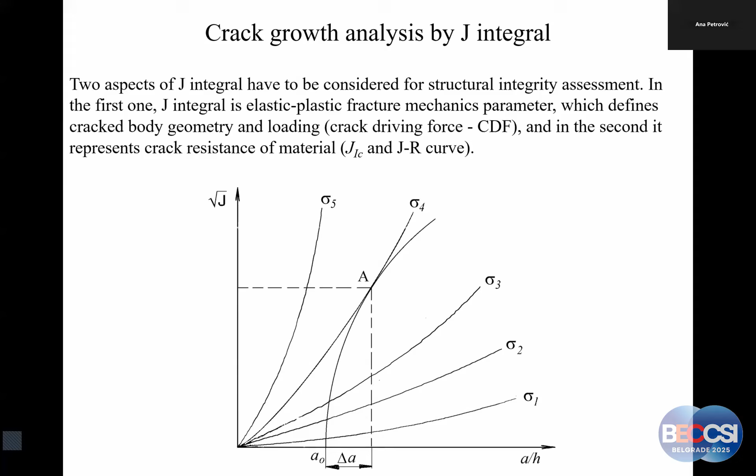Now, direct measurement of J integral breaks this barrier, and maybe offers a different interpretation of this parameter on its own.

It is the original paper that we have used from time to time here in Serbia and also in USA, while we had a large USA ex-Yugoslavia project back in 1982 to 1990. Cooperation with one of the key men in this project was Dave Reed, who is mentioned here.

Just to remind you, the J integral is a line integral independent of the path. It's all about energy - it is strain energy. It involves some stress tensors and some displacement.

When we develop it into components, we can write strain energy as shown here, and then for some specific problems we can reduce it to just strains. Now let me say more details about that.

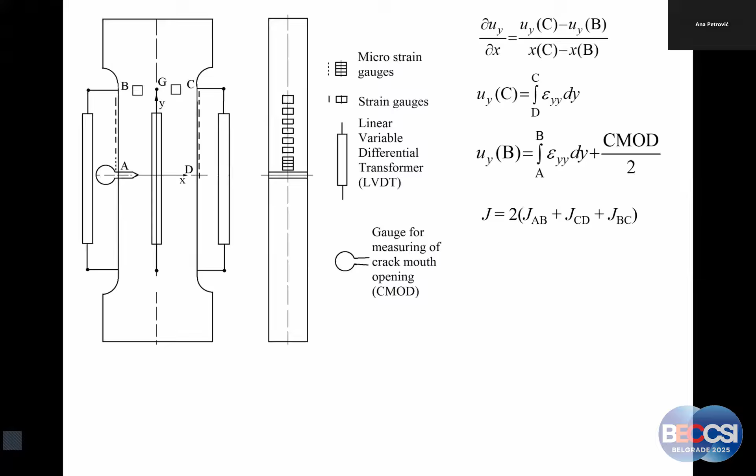This is how one of the measurements was done. There are all these strain gauges. This is quite old, more than 40 years. It was done at the National Institute of Standards and Technology in Boulder. Dave Reed was doing it together with Blagoj Petrovski, who was then a visiting scientist there. You can see that the crack was positioned in a welded joint. Once again, not very important, but it has some consequences.

Oh, sorry, just for a second to go back. At the same time, a standard 3-point bending specimen is shown here for comparison. I'll explain soon.

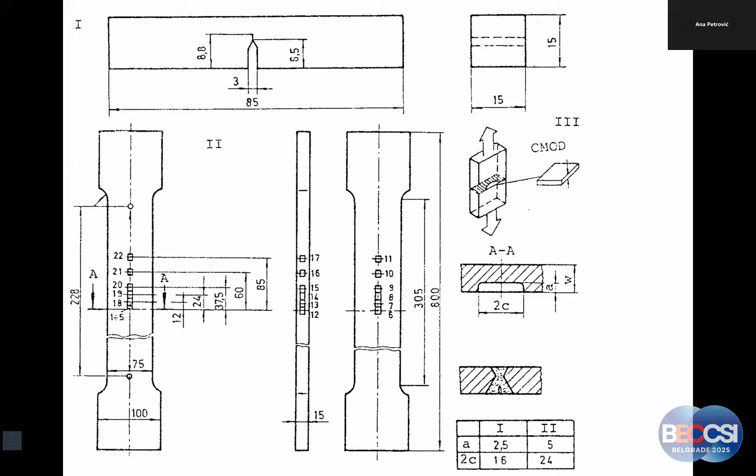More details about the crack and more details about the path. Misak, help. What happened? Oh okay, just another click. Okay, thank you.

These M's are actually strain gauges, and there is a CMOD gauge measurement device here, and that's all we need. So just memorize that all we need are strains along the outer path plus a CMOD measurement device, and strain gauges along the other outer part. Knowing all that,

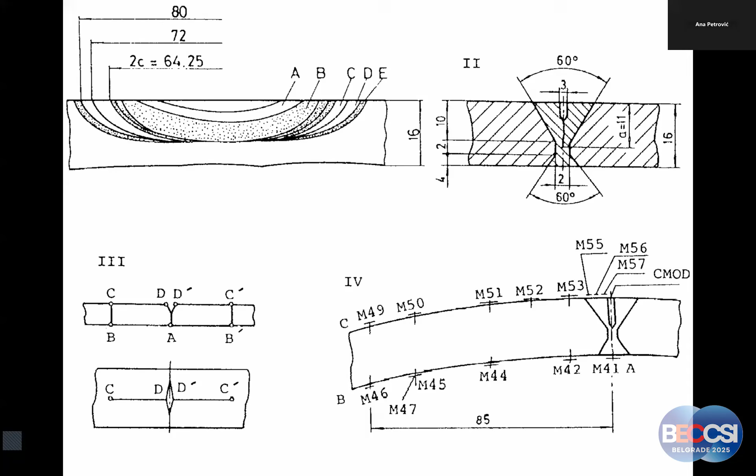we can get J integral by direct measurement because we can use those simplified expressions that I showed. And then it is

interesting to compare JR curves obtained in this way, and I'm showing them as measured by panel tension or other crack types. They are actually wrongly marked here. Oh no, surface crack, no. Doesn't matter really, two different

crack lengths and two different J curves positioned differently. And then just to compare with 3-point bending, you can see that crack resistance is higher for panel tension specimens, or tensile panels. This is obvious, the reason is obvious: 3-point bending is more harsh loading than tension.

But on the other hand, we of course like to have a conservative approach. This is why we use 3-point bending. But on the other hand, for example for pressure vessels, we also like to know the real behavior of the material or structure. That is the question, we'll come to that.

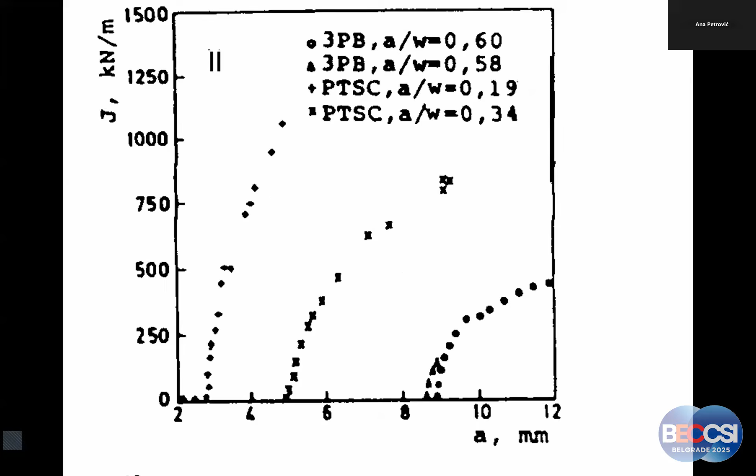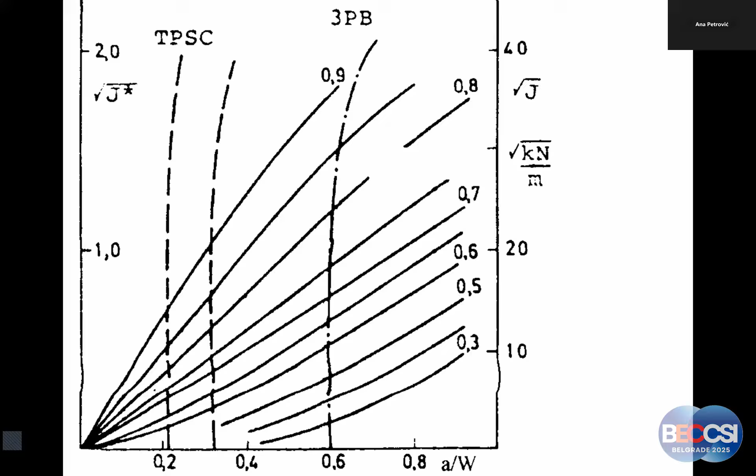So just another figure of these JR curves, and now they are positioned in a plot with the crack driving force. And now I come to the most interesting part of this story.

In ex-Yugoslavia, there were on two occasions very interesting experiments made on pressure vessels. You can see here that there is a part of this pressure vessel which was cut out and then welded back. In the meantime, complete instrumentation for measuring strains was installed. So that was a kind of unique experiment that enabled us to measure J integral on a pressure vessel. Without this cutout piece, you cannot approach the inner side, and we need both outer and inner side.

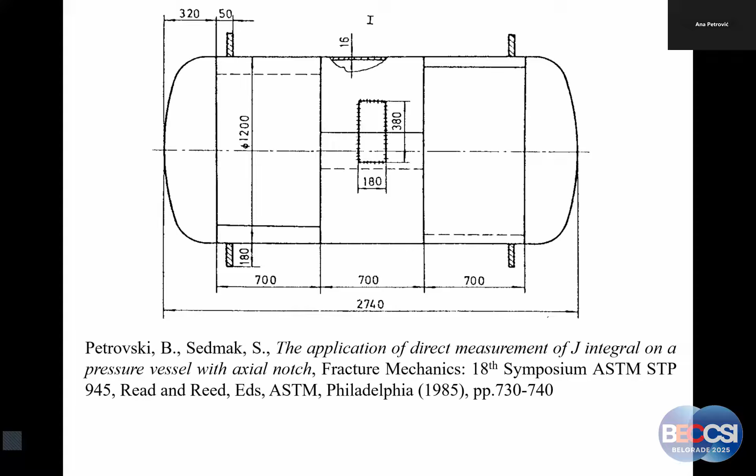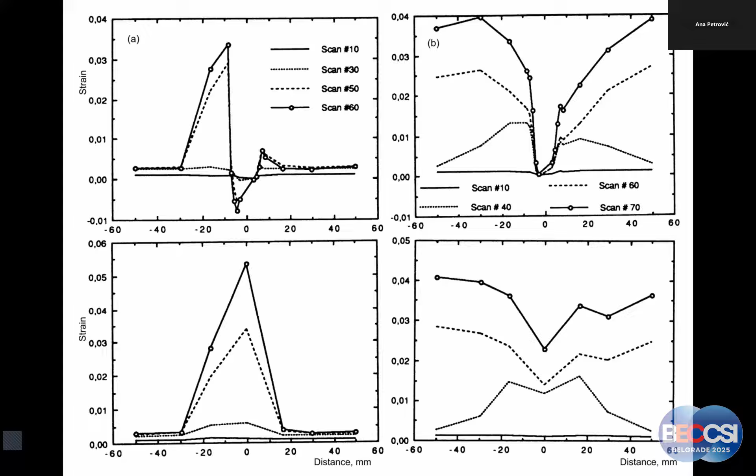Now, a couple of interesting results which show strain distribution on the side of the crack and on the opposite side. You should notice a difference in these strain distributions, because that difference is actually, as I will show you soon in a simpler example, a measure of J integral—simplified, even more simplified. So let me explain what I mean.

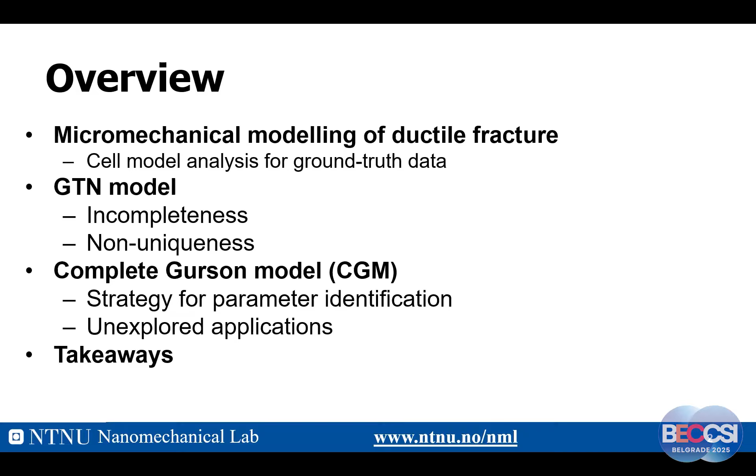Okay, so how do we teach fracture mechanics today? When we teach fracture mechanics, first we tell students that there is a crack-tip stress field controlled by one parameter, either J integral, which Alexander talked about, that's from Jim Rice, or controlled by CTOD. Several weeks later, we tell the students that's not true indeed.

The crack-tip stress field is not controlled by one single parameter. It's controlled by maybe another parameter - we have T stress or Q stress. So here's what I've plotted: the crack-tip stress field may be controlled by Tz. Professor Guan gave a fantastic talk today about the Tz constraint parameter.

In general, what we're saying is that fracture toughness is not a constant - it depends on the crack-tip constraint. Transferability is a challenge. We cannot transfer from one geometry to another.

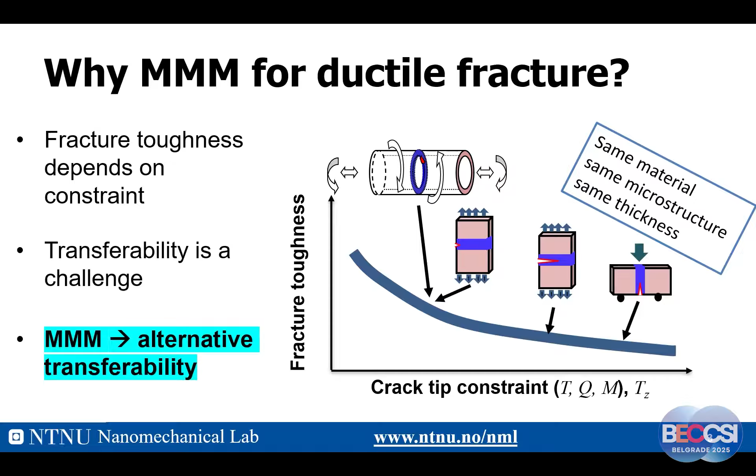So what is micromechanical modeling? It's a kind of physics-based approach used to predict macroscopic properties based on local properties and microstructural features. If you look at the specimen on the left, we can easily identify a kind of unit cell model.

Here I have a unit cell model in the center, and I have four keywords. First, there should be periodicity - that means we can repeat this unit cell model. And at the bottom, there is approximation - it's always an approximation of the microstructure, since the microstructure is always more complicated than the model itself.

With the unit cell, we can study the morphology - that includes the size, shape, and distribution of these phases - and morphology and local properties, on the right, on the macroscopic behavior.

On the right-hand side we have ground truth data - that's data we can use for benchmarking analytical results, for example benchmarking the Gurson model and the GTN model. We can use AI to identify the critical microstructure which can realize optimal performance - this is going to be the optimal microstructure. These are the things we can do with micromechanical modeling.

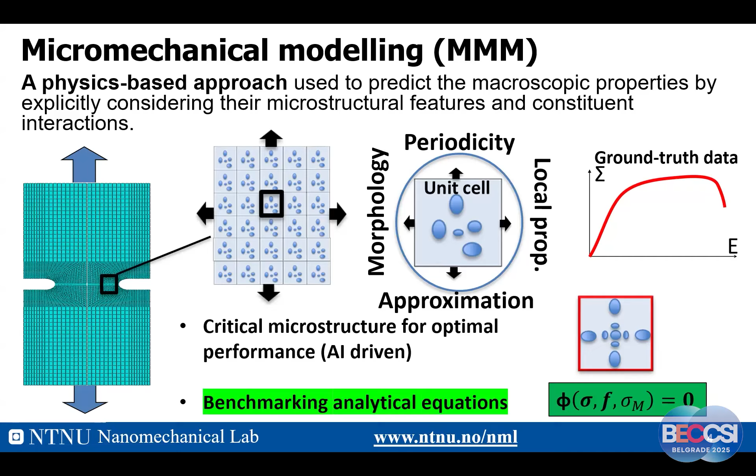Okay, let's look at ductile fracture - that's my talk. Ductile fracture is a field which is massive. Everyone has heard about this - a lot of studies have already been carried out.

Ductile fracture mechanism - if you look at the fracture surface, there are a lot of dimples. We have three stages of ductile fracture mechanism. We have void nucleation, from particles through particle fracture or particle debonding from the matrix, and this nucleation could be stress or strain controlled.

We could have plasticity-induced vacancies that could nucleate voids - this is very exciting for the hydrogen embrittlement work we are doing now. Once voids have been nucleated, under plastic deformation and hydrostatic stress, these voids will grow.

At certain stages, the void growth will be stopped, so we will have void coalescence - also called plastic localization by void sheeting. Here we have two types of loading: one is tensile, another is shear. In this talk, we will focus on tensile loading.

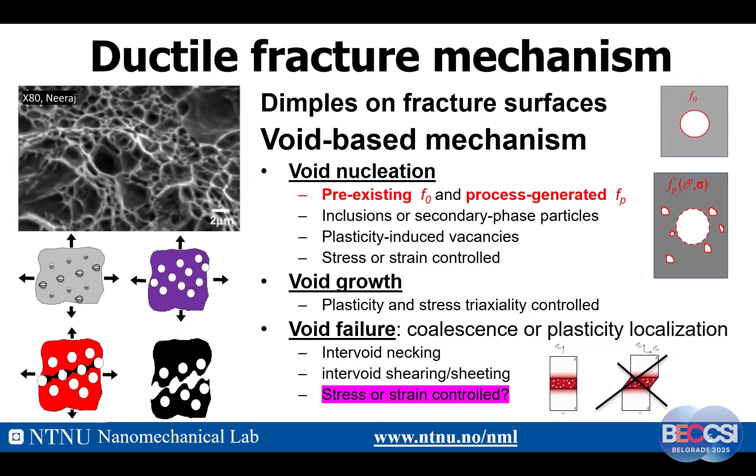My question is, can you guess - is void coalescence stress controlled or strain controlled? I will ask you this later. So let's talk about the cell model.

For ductile fracture, we can easily identify a two-phase cell model. One phase is the matrix material - that's easy to understand. Another phase is empty, nothing - so we have a hole inside. This is a very typical two-phase cell model for ductile fracture.

If we make a cell model analysis, that means we can carry out numerical analysis of this cell model. What input do we need? We need the matrix property - sigma 0, that's yield stress, and n for hardening. These are the matrix material properties. Then we have f0, the initial void volume fraction - that's the only other input we need.

Then we apply a load to this cell model, and we get output on the right-hand side - we will have deformation and fracture. This means f0 can autonomously control deformation and fracture.

Deformation is homogeneous plastic flow, and fracture is localized plastic flow. So the cell model can reveal both deformation and fracture - that's important, and that means it's complete. A complete cell model can reveal both deformation and fracture.

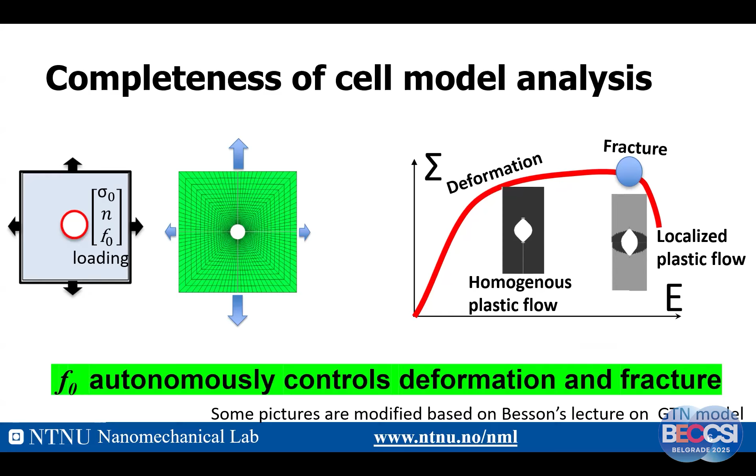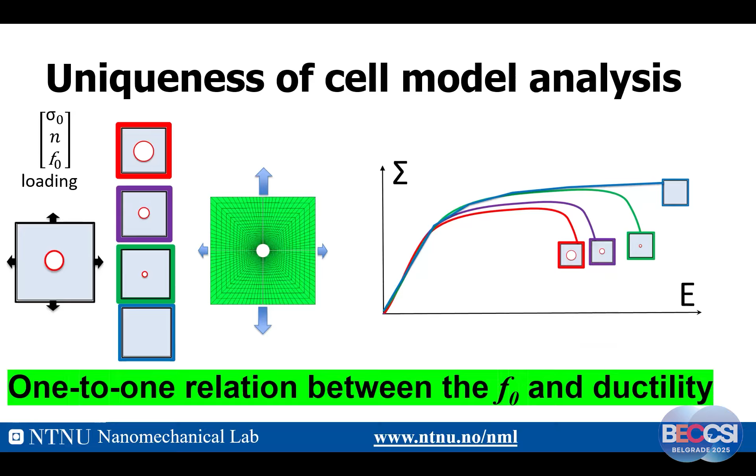Okay, this is completeness. The cell model is also unique. If we try different void volume fractions—on the left you have blue, and you have red, purple and green—so for different F0, you get different ductility. This is unique; there's a one-to-one relation between the initial void volume fraction and ductility. That's important. So for cell model analysis, we have both completeness and uniqueness.

What about the analytical models? Let's take all these models available. Everyone here knows about the von Mises model. Von Mises model could be regarded as a kind of micromechanical model as well. So let's start with the von Mises model.

Von Mises model is a kind of yield function. There is no inherent failure criteria. You can use the von Mises model to analyze the problem, but it can only yield—it cannot fail. That's an important message.

Then let's look at the Rice-Tracey model—Professor Rice again, a very famous model. If you think about it, we have an infinitely large plastic domain, and inside we have a very small void. Under plastic deformation with hydrostatic stress applied, we get void expansion.

So the Rice-Tracey model can calculate R dot over R. This is interesting, but there is no inherent failure criteria. That means you can probably use a critical value for this expansion, but you cannot predict the failure.

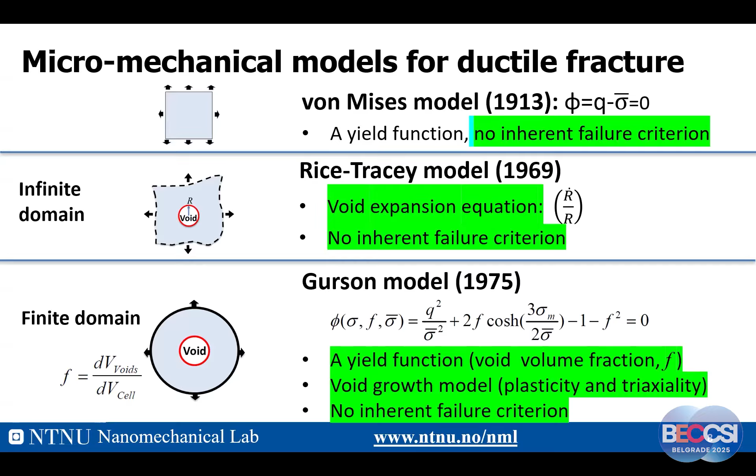So let's go to the most famous model, the GTN model. After the work of Tvergaard and Needleman, the Gurson model becomes quite capable. GTN can consider void nucleation—we could have cluster nucleation, continuous nucleation, or statistical nucleation. It could be stress controlled or strain controlled.

And then we could have void growth—that's already in the Gurson model. GTN could also consider void failure, providing a framework for it, but it needs FC, the critical void volume fraction. There is no inherent criteria for that.

Maybe it's confusing, but let me explain a little more. FC was indeed assumed by Tvergaard-Needleman to be a constant. But it turned out that it's not constant. I used the Tvergaard-Needleman data and found that FC depends on the stress triaxiality and on the initial void volume fraction. That means it's not correct to assume FC is a constant.

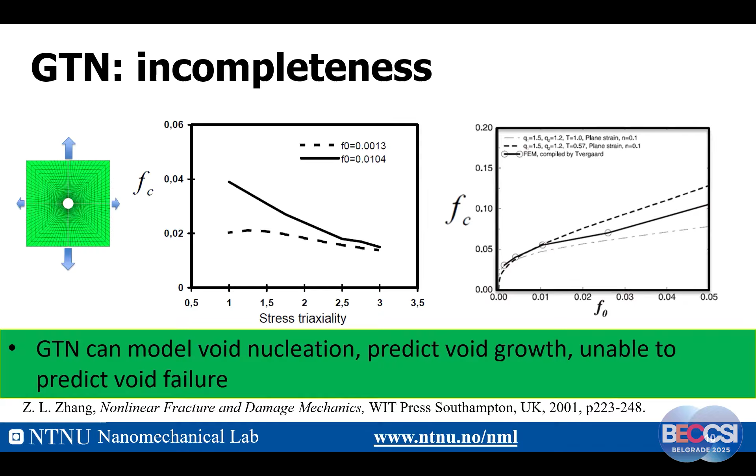So my conclusion is that GTN can model void nucleation, can predict void growth, but is unable to predict void failure. So it's not complete—there is an incompleteness problem.

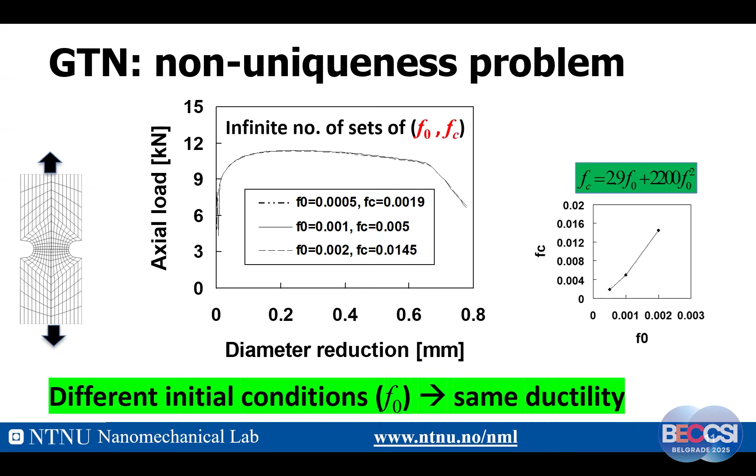And because of this incompleteness problem, there is another problem called the non-uniqueness problem. For a notched specimen, you can find infinitely many sets from F0 to FC that give identical or almost identical curves. So you can have an equation: FC equals a function of F0. That means the problem is that different initial conditions can lead to the same ductility.

That's a problem. Because of this weakness of GTN—this was around 30 years ago—I was inspired by Thomason's work. I tried to incorporate Thomason's model into Gurson's model. Ductile fracture is complete only if a model includes void nucleation, growth, and coalescence. GTN is not complete because it cannot predict void failure—coalescence is simulated by an arbitrary, negotiable FC. So by incorporating GTN with a physical coalescence model, we get the so-called complete Gurson model.

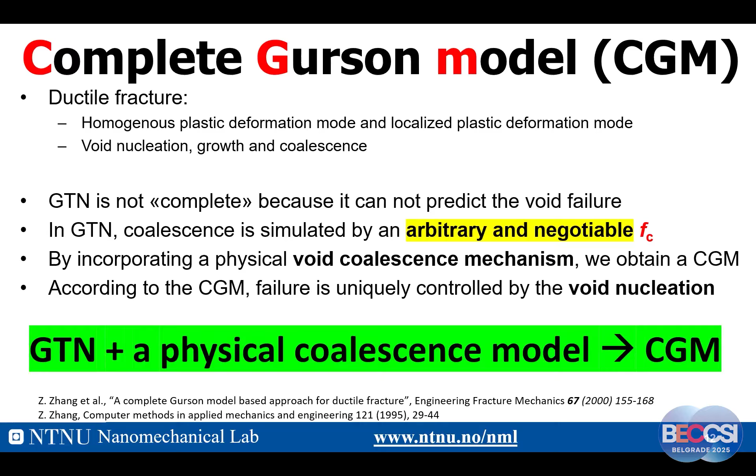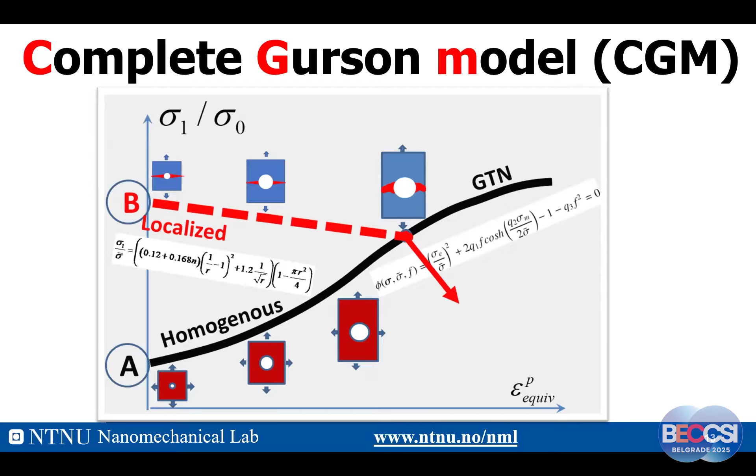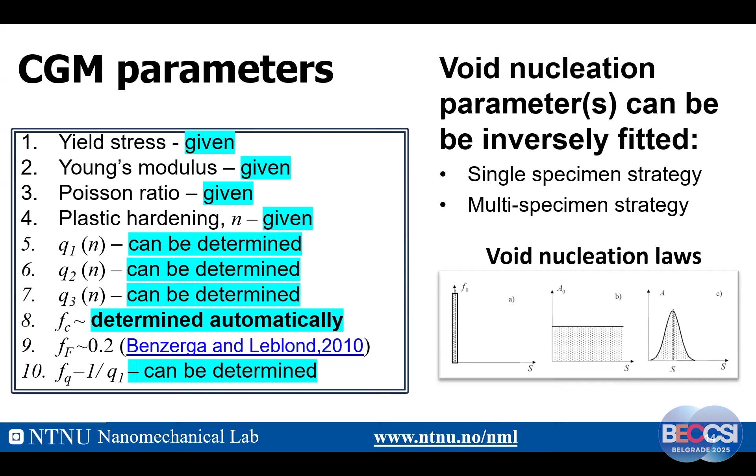We can use single specimen strategy or multi-specimen strategy to fit the nucleation parameter. Because the nucleation parameter is the only parameter which needs to be determined, it links to material failure by a one-to-one relation.

Here are the strategies to fit it. If we use a single specimen, we can make different calculations with the void volume fraction, the initial void volume fraction, and find the one that fits the experiment very well. Then if we use a multi-specimen strategy, we can fit the ductility.

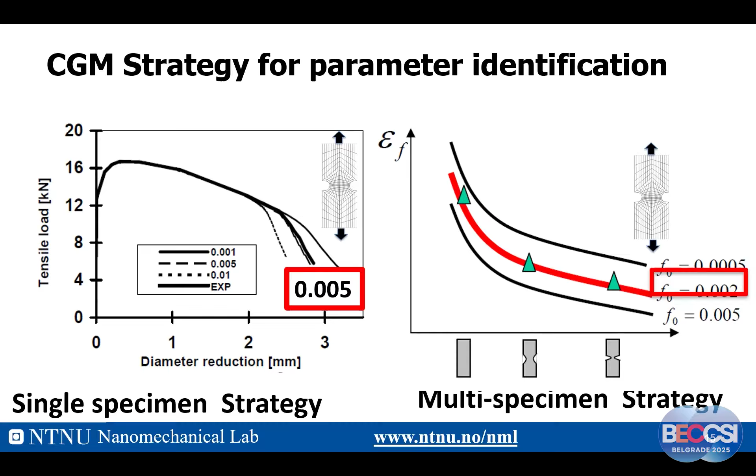So we can use different nucleation models. If the cluster model is not working, then we can use the continuous model. And if the continuous model is not working, we can use the statistical model. My advice is to try the simple model first.

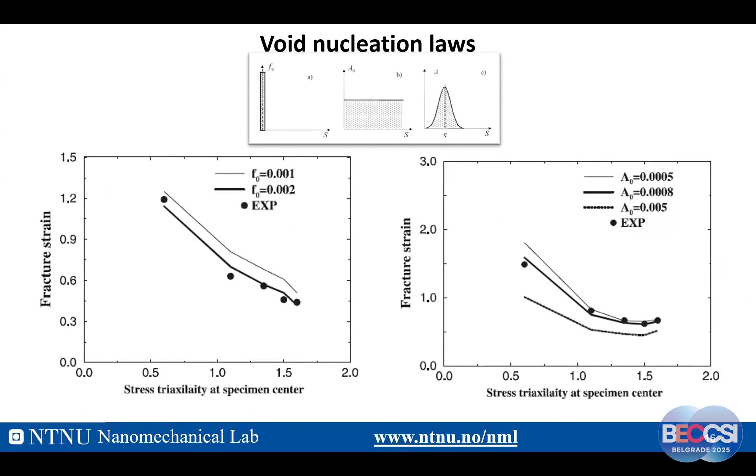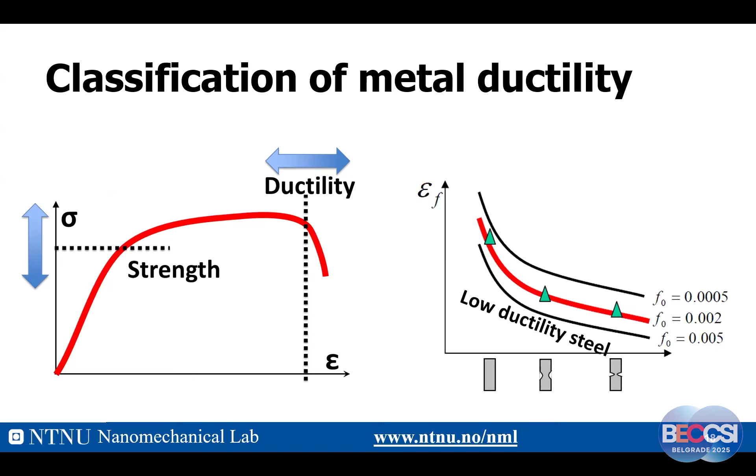Another unexplored application: we know we have high strength steel, low strength steel, medium strength steel. But have you heard of high strength but high ductility steel, or low ductility steel? You've probably never heard of this, but it's very much needed. So with ductility horizontal and strength vertical, we could use the nucleation parameter to classify steel this way - giving us low ductility steel and high ductility steel. So this is possible.

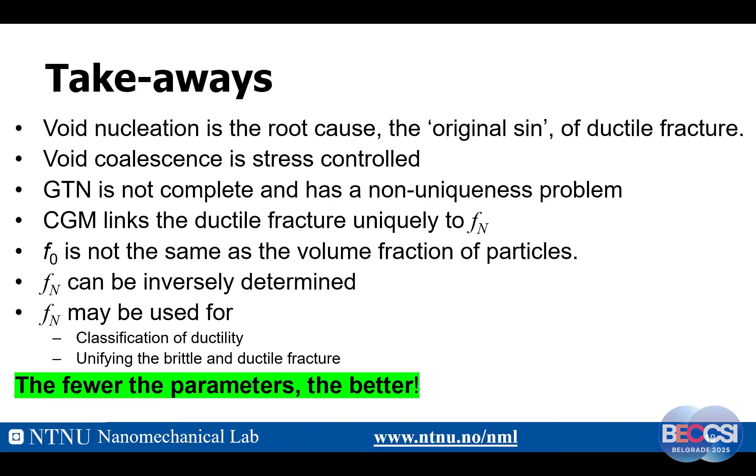Professor Zhengfang Qian - oh sorry, sorry, yes, well it's difficult. Yes, thank you. He will talk about viscoplasticity and damage evaluation.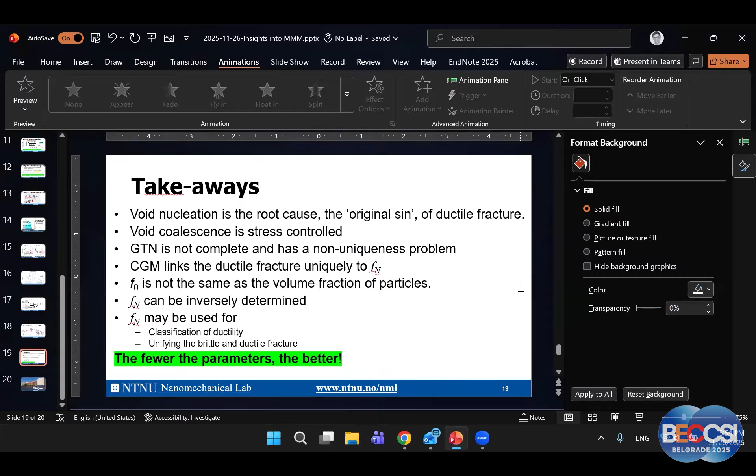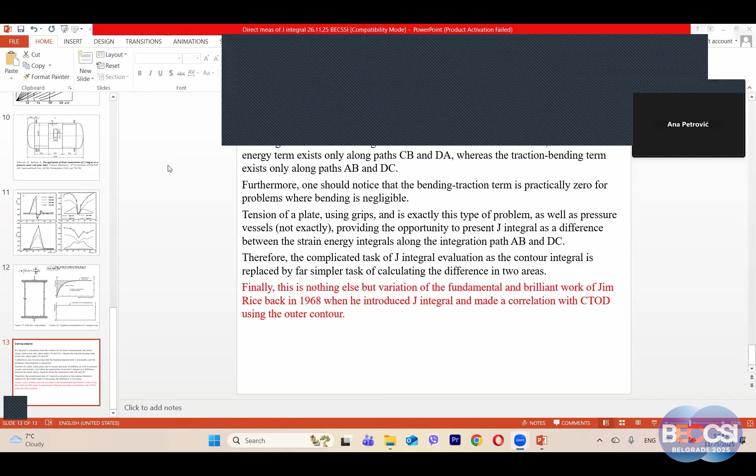Not this one? Reliability engineering. That one? Just share the screen - we have to share the screen. Okay, can you see my one? Share the screen first, open my file. Can you open my file now? Yes, of course, okay, just a second. You go ahead, where is your file? Should be Parallel session 1, parallel session 2. No, I still... inside the USB, okay, here.

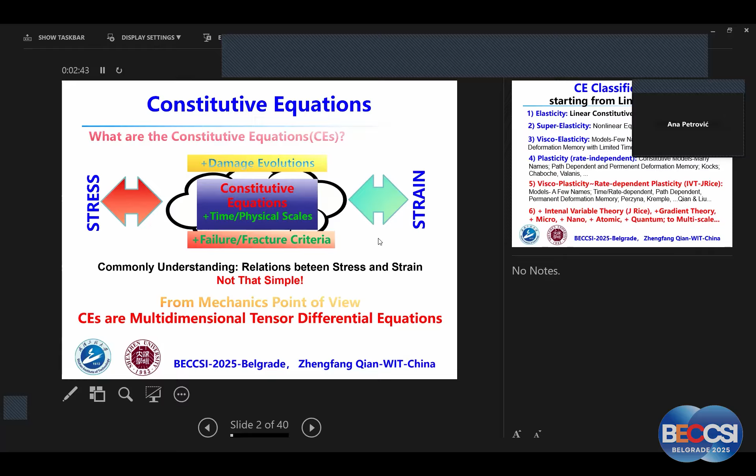Let's look at the classifications. Elasticity - one name is Hooke, and hyperelasticity is nonlinear and recoverable. There are already names for these, I'm not going to go through all of them. Now we come to visco-elasticity, and up to plasticity there used to be two types: one called rate independent, another called rate dependent. Rate dependent is equal to visco-plasticity - this includes temperature, rate, time, almost everything. So visco-plasticity includes both plasticity and elasticity.

I worked from visco-elasticity to visco-plasticity - we can unify all of them together into one universal constitutive equation. I did this about 20 or 30 years ago during my PhD thesis. It all comes out generalized now. We call it - he introduced the internal variable theory in 1971. That was my starting point for my PhD. Later on, I will show you exactly how that develops.

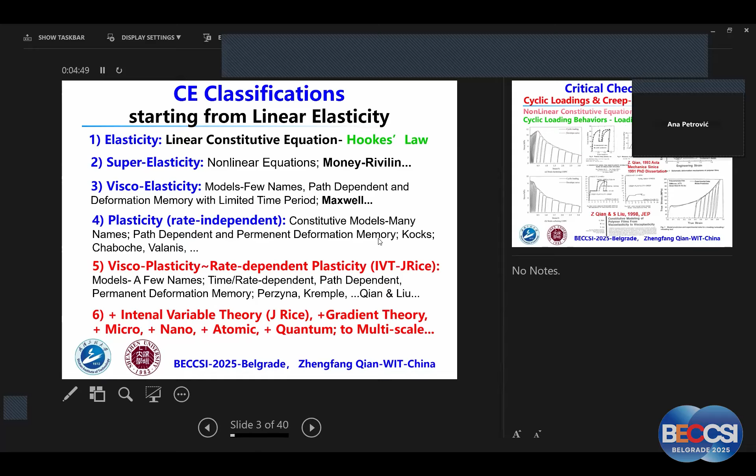Then I found gradient theory - actually, from a quantum mechanics point of view, there are so many gradient theories, so I don't think it's new. Then you put on micro, nano, atomic, then quantum to multi-scale. The presentation will show you how to do multiple calculations across multiple physics.

I really believe any equations need checkpoints, not just curve fitting - you have to set some critical criteria for how good or bad it is. For instance, checking against cyclic loading is a very good one, especially like this - this is called cyclic hardening, cyclic softening. Actually, this is a kind of damage process.

That's for metal. If you look at polymer, it's more complicated - this is polymer cyclic loading and unloading. But this is only one-dimensional, and really you need to check further - I will show you it should be at least two-dimensional. Otherwise, you still can't say whether it's good or not.

During my PhD thesis, a Japanese scientist and an Indian scientist did work where they tested creep, then plasticity, then creep again, and also plasticity, creep, and plasticity. They checked more than 20 constitutive models - none of them were good. That was my starting point for developing a constitutive equation that could cover all of this. I spent one very hard year trying to get the solution.

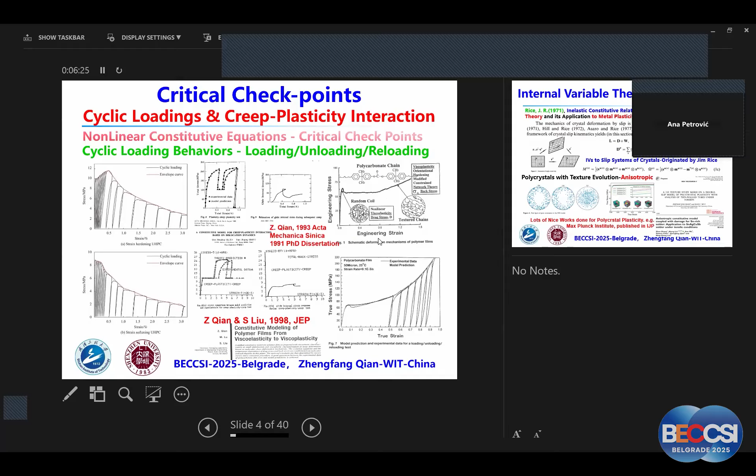Here comes - my starting point actually is from Jim Rice. I didn't have the chance to meet him in person. Let's look at his first 1971 paper - this is called 'Inelastic Constitutive Relations for Solids.'

Okay, an internal variable theory and its application to metal plasticity. Let's start with the slip system. Then this tensor, how to decompose it. This is defined: one is deformation, another is rotation.

That system also started with rate dependent. Actually this is kind of physical. So this starting point is from the slip system. Later on, we had a new PhD student, he repeated it again. This is called texture. And then you can do the anisotropic plasticity. But I would say Max Planck did a very good job for this.

And they published the whole program, free on their website. I get very impressed by that. I think someday I will open my old program to the website.

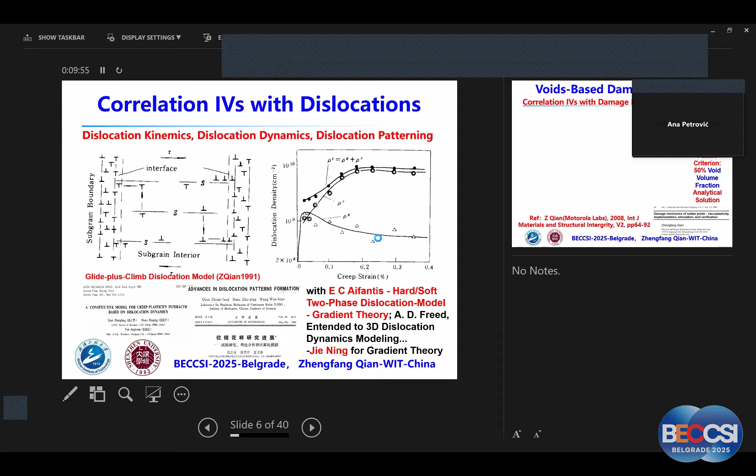Driving force is for the plastic deformation or inelastic deformation, but the effect is they will damage the Young's modulus. That's what I did, and using inclusion, I got an analytical solution. All that comes, I also got a criterion, exactly 50%.

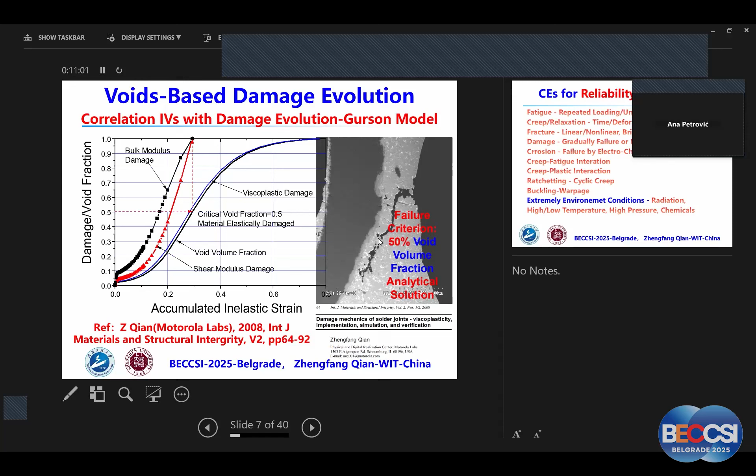Okay, but this maybe isn't the analytical solution - at 50%, Young's modulus will go to 0. I use this to do the crack automatically generated. You will see that.

Okay, let's talk about reliability engineering. We use the constitutive equations - this is my own opinion, okay? I mean fatigue, creep, relaxation, fracture - damage and corrosion is something else, okay?

Creep, fatigue, creep plus ratcheting, buckling is something else too. Most of those can be solved with constitutive equations because they come from loading condition. They come from environment effects. They come from defects, right?

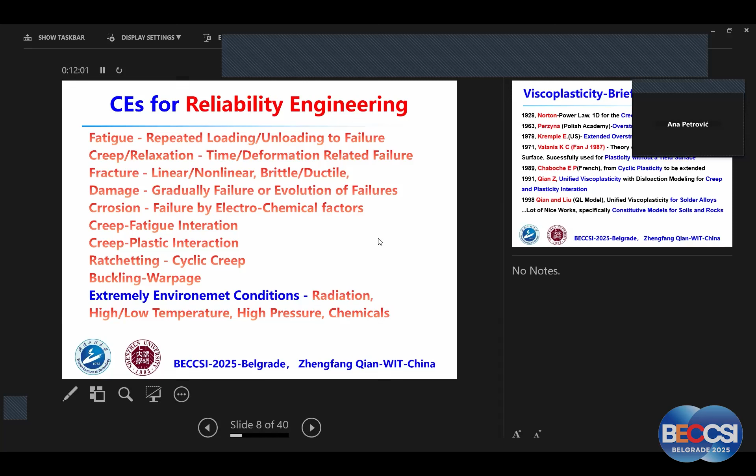If you put all those inside correctly in the constitutive equations and the computation, they can tell you what's going to happen - how the reliability can be predicted. We can do predictive reliability. That means we really can predict and not guess.

Okay, since I'm the presenter, I want to do a little bit of brief history - it's not full. Most people know the Norton law. This is a one-dimensional high power law. In my opinion, this is not a constitutive equation, just a curve fitting.

Okay, second one is for Perzyna, actually from Europe. I remember he was a Polish Academy member, and he has a model called overstress. Okay. Then I came to America and met Kremple.

Okay, then the French, Chaboche. The Chaboche model is actually part of - I would say, no - there's one good name called Valanis. My PhD advisor is Fan, and he followed Valanis, got a PhD degree at about 48 years old. And then I became his first PhD student.

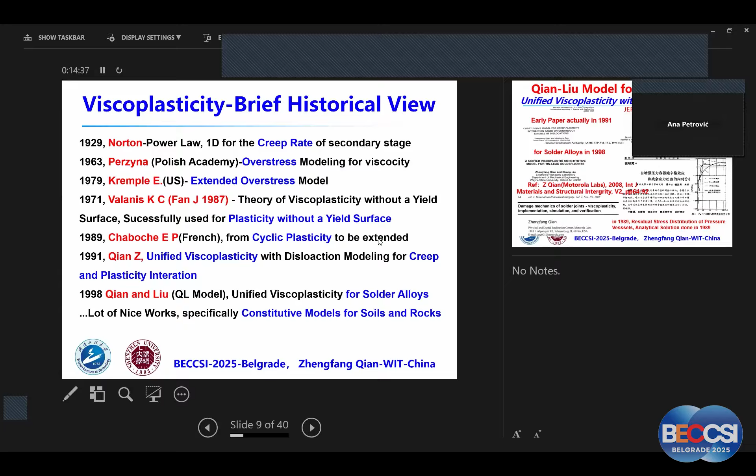Actually, I developed this model and asked Dr. Liu, okay? He said right now it's called the Qian-Liu Model, okay? Actually I worked on this model for about 10 years. It started from my PhD. I even used this model for an analytical solution for residual stress that was published in Chinese.

That was in 1989, when I was a PhD student. Then I did my first publication actually at an American ASME meeting. The chair was Dr. Freed from the NASA Center, and he invited me to give a presentation. Later on, we used this model for a special material called solder alloys.

You open your computer or cell phone, there's lots of solder joints. If something fails, very likely it's the solder joints, okay? So then we used this model for the solder joints. Later I'll show you, it's a very good material to check constitutive models, okay?

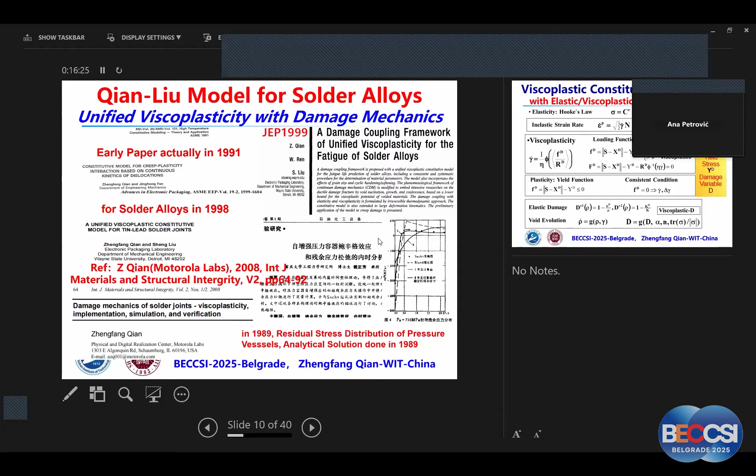And then when I went to Motorola for my job, at that time I didn't have enough data to verify my model. Then we found there was tons of failure data and verified my model, but we still published this paper 5 years later. Actually, I finished the job in 2003, then published in 2008, okay?

This is a brief history. Let me go a little bit quickly. Later on, I introduced 4 internal variables for our whole model. This is called unified physical constitutive equations.

The first one we call the back stress tensor. This actually represents plasticity. The second one is called drag stress, this represents physical hardening. The third one is yield stress, the traditional one, right? The fourth one, the void evolution model, is the damage internal variable.

The only trick is how do you get that differential equation, okay? I have, almost, this is an analytical solution I did.

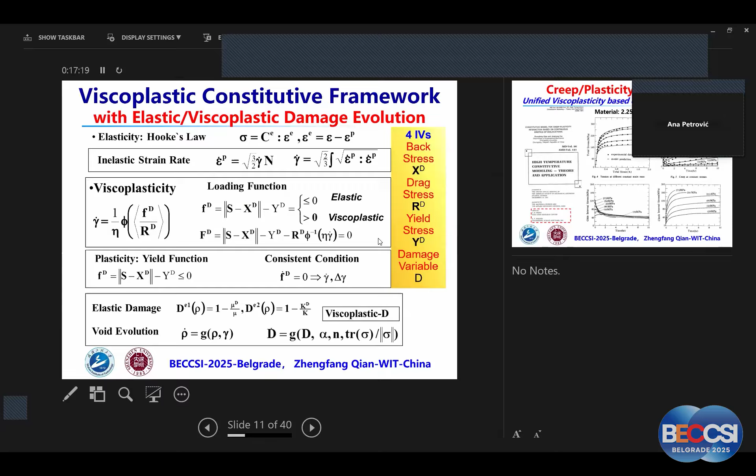And tension is at a high rate. The strain rate spans almost 11 orders of magnitude. In my time, I didn't find any constitutive model that could fit 11 orders. I did it.

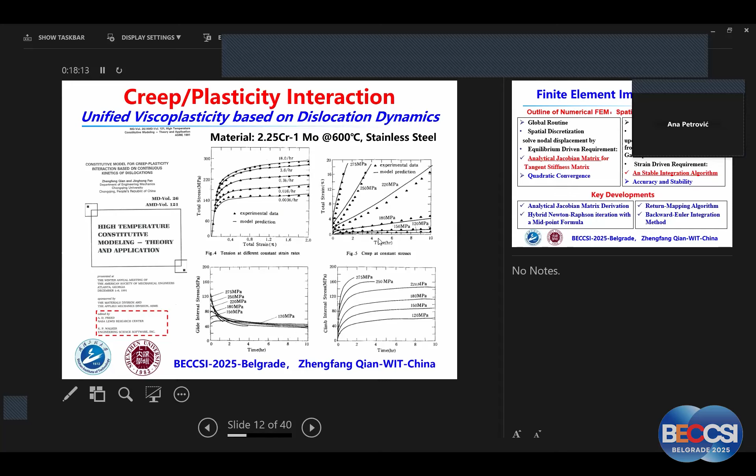And the second one, which is more difficult, is this testing. Oh, did I show it? Maybe later on I'll show you. Creep to plasticity and back to creep, and plasticity to creep and back, that is very challenging too, okay?

And then, like I said, any constitutive model, if you can't implement the algorithm and just put it on paper, nobody can use it, okay? Then I started the implementation. At that time I worked at Wayne State University, okay? I spent 3 months in the lab, day and night, to check out where it was wrong. Except yourself, nobody can tell you where it's wrong, especially with the program.

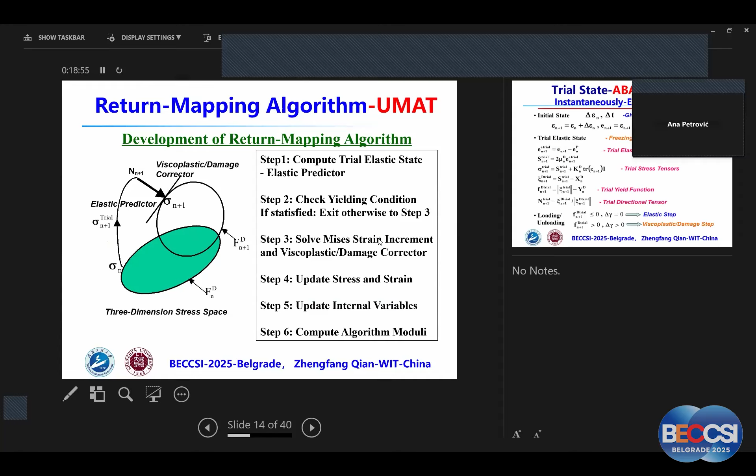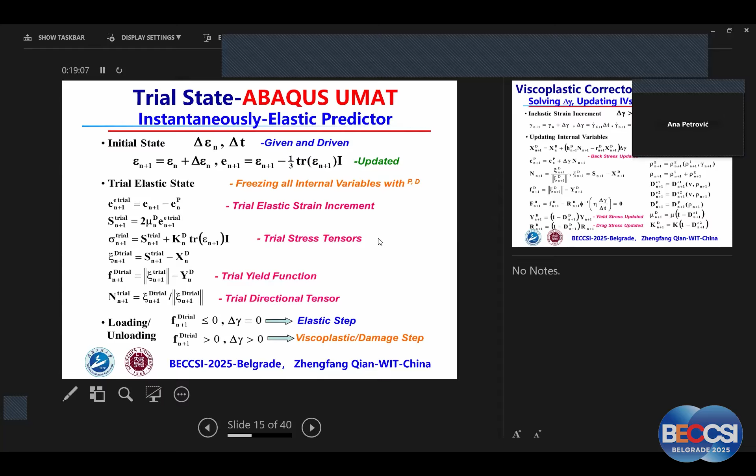Okay, this algorithm is called return mapping. This was developed by Stanford University, this algorithm. And then you have to do this: for the first guess, the initial solution is elastic, and then you try to come back and correct it to the right solution.

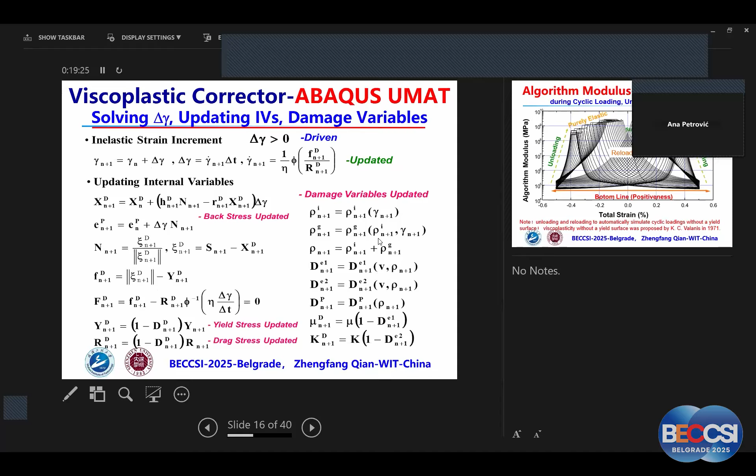And then you have to develop all the back stress, drag stress, yield stress, and damage. You have to update all of them for the integration. And the important thing is you have to make sure it's converging, okay?

Here is something most people don't understand. You see this? When you do loading and unloading, the modulus will jump 1, 2, 3, 4, 5 orders of magnitude. It's called stiff equations. Most commercial finite element codes fail because of this.

You can just see it directly. I had a guy when I was at Stanford, his advisor was an academician of the American Academy, and he came from Tsinghua University, the #1 university in China. He asked me, how do you do the cutback for this?

I said, my constitutive model and the computation go automatically. He looked at me, he never believed it. Anyway, that's why I said the only trick is I have an infinite yield surface, okay? That's how it's done. They have a special mathematical structure.

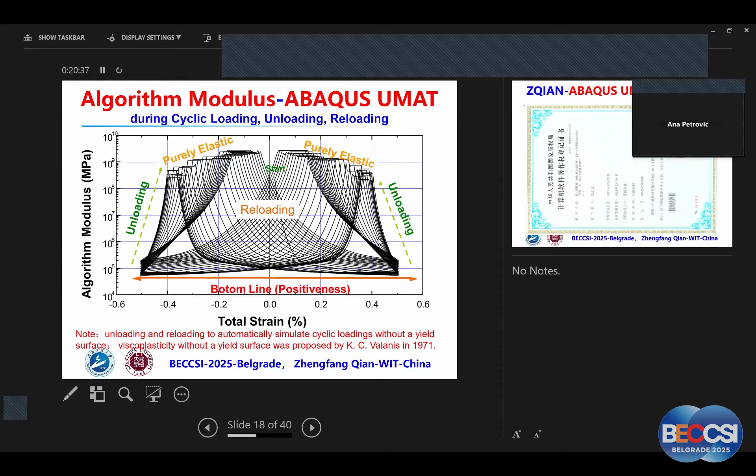Okay, I'm holding back because we should do a copyright, right? So I did the copyright. And later on, if it really works out, I will release this copyright to everybody.

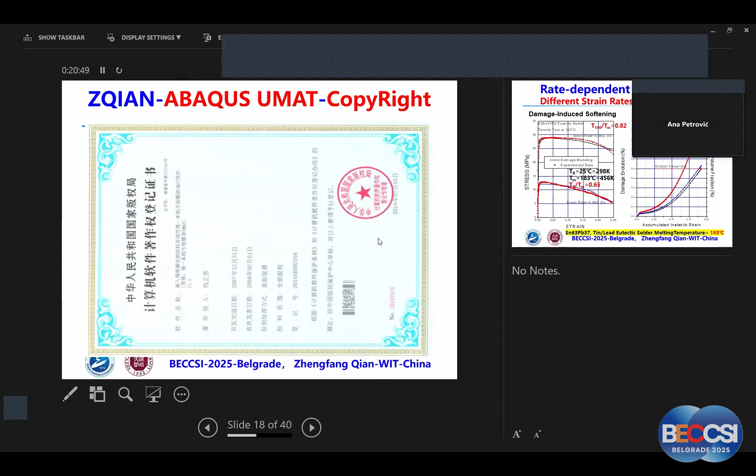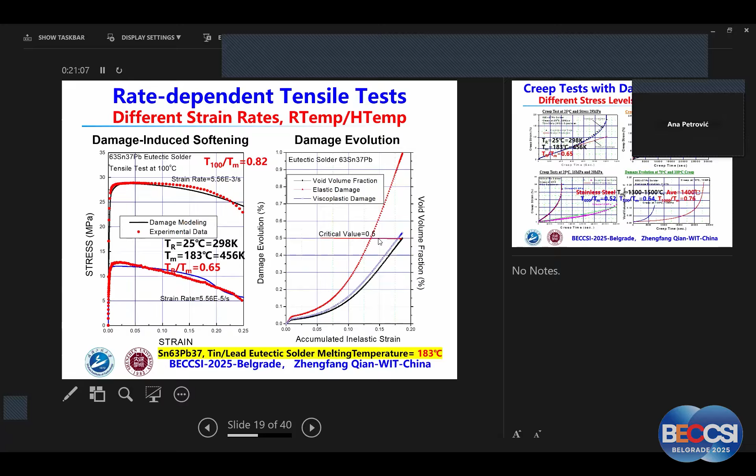The solder material, especially eutectic, has a melt point of only 183 degrees C. In theory, you take the Kelvin temperature and divide it by the melting temperature. If above 0.5, that means creep will be significantly contributed. For instance, for solder joints, 75 degrees C is equal to stainless steel at about 1000 degrees. So you see, stainless steel mostly can't support like 1000 degrees C, but this is very good even at room temperature.

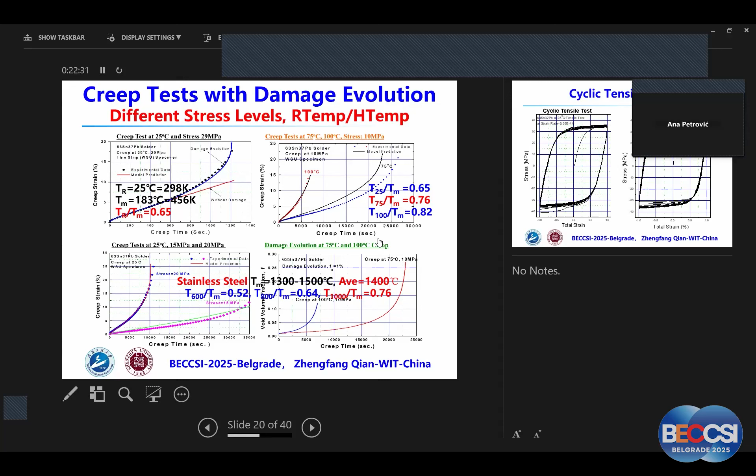Then we're going to 0.65. At room temperature, solder joints in your cell phone, in the computer, they will creep automatically, and sooner or later they're going to fail. That's why computers only last a couple of years, 3 or 4 years, before they die automatically. Don't worry about it, sooner or later they're going to fail.

The checkpoint here is when you do the cyclic loading. Look at here, all the commercial codes must be broken here. You check all those equations, if they're broken or not. They use cutback rules, and most of the time they will diverge. But in my model, they go through automatically.

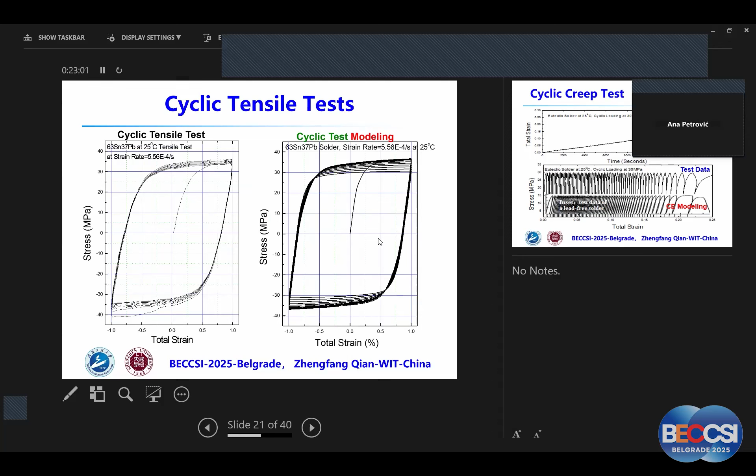Left side is the test, cyclic loading. Another thing is called ratcheting. My PhD advisor was asking me to do ratcheting. I said ratcheting is just one of the effects. I proved ratcheting is one of the effects from the constitutive model. If you do cyclic loading on a pulse like this, it comes out automatically. You don't need a special constitutive model for ratcheting.

I just studied this now, back to mechanical engineering. They were asking me to do this. We have a flange, we have screws, we have a seal by rubber. What are we going to do? I'll show you one now, I just did this.

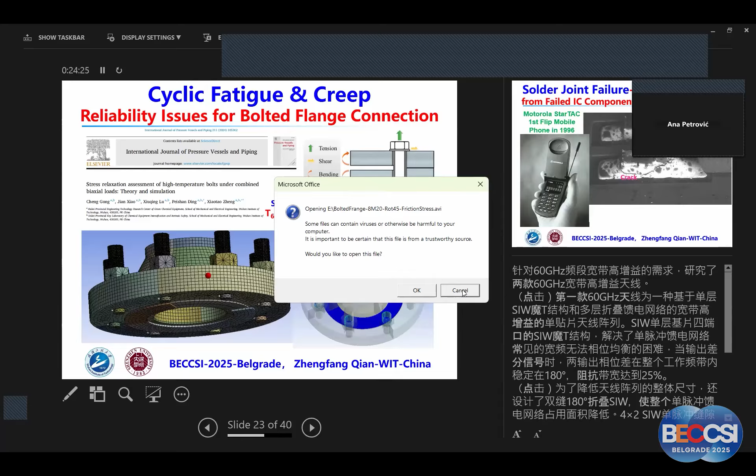Okay, let's see if this video works or not. For instance, when you turn the screw, that will have friction. This is a contact problem, also geometrically nonlinear. Later on, we will transfer this to the material nonlinear. You will see how, when they're going to fail, how they creep, what is the cycle. Preloading, after loading, you will see all of that, and it comes out automatically. You don't have to do anything special to look at that.

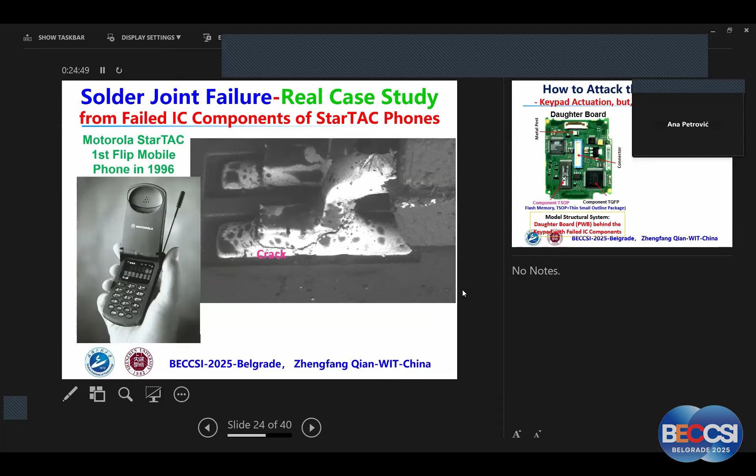Especially there is a failure analysis. Let me show you. Failure analysis, all correct. Some is started, some is stopped, some goes slow. When all that goes slow, this joint is going to fail. Part of that you will see the noise, sometimes it works, sometimes it doesn't work. That's because the crack just opened. When it's closed it's okay, when it's open they change the resistance.

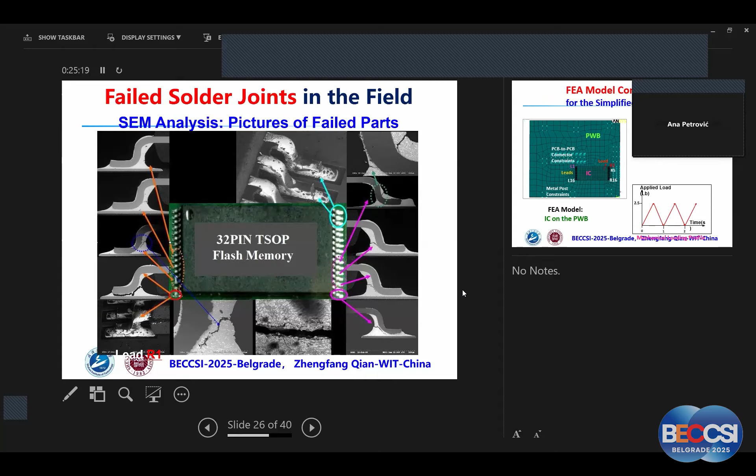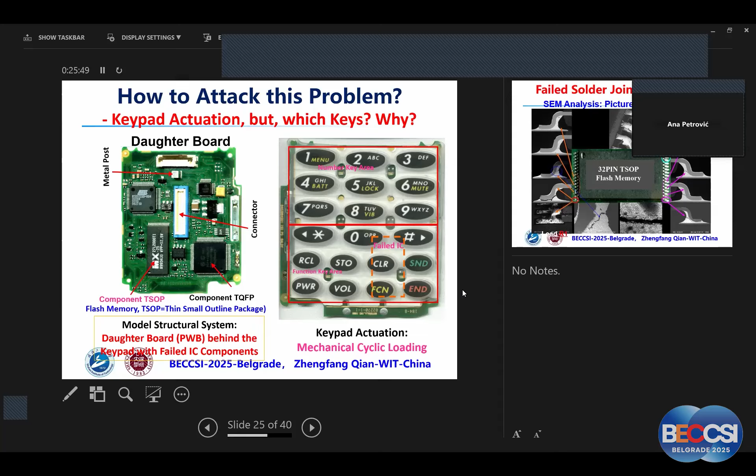How can we attack this question? Very interesting, this phone has push buttons, and we were able to identify the most failed IC. You see, the most used key, send key, function key, and another key. This is the most used. So let me show you quickly now.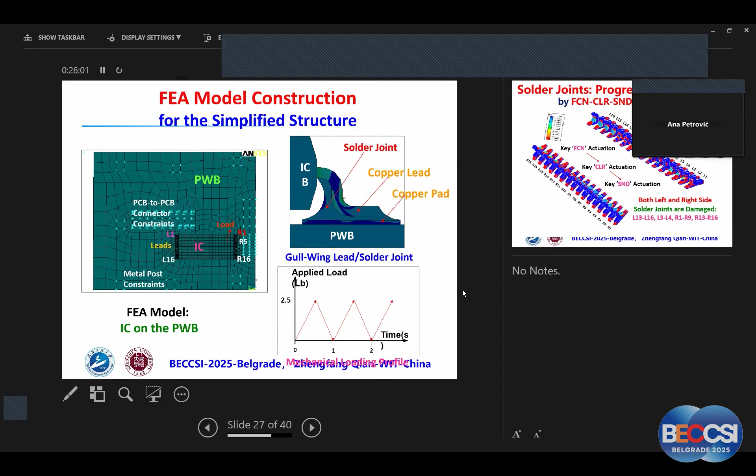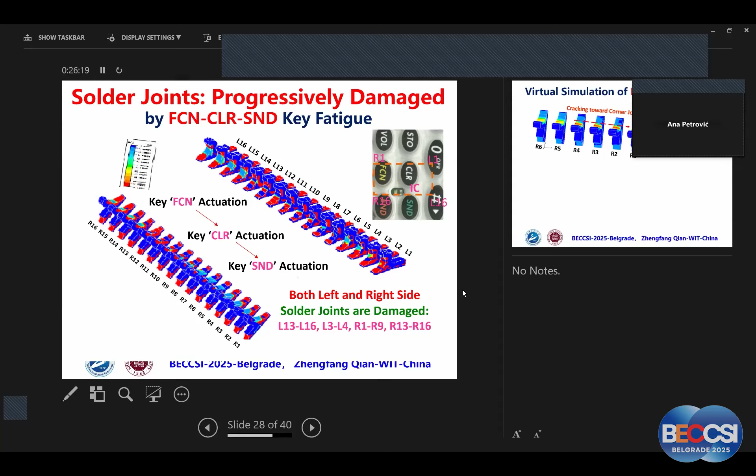We identified these keys pushing caused it to fail. This is a finite element model. Then I put our constitutive model with failure criteria, a Gurson model. Now you will see all the crack points. It starts here, and the crack will start here. It just started, and then later on I can show you even how they propagate automatically.

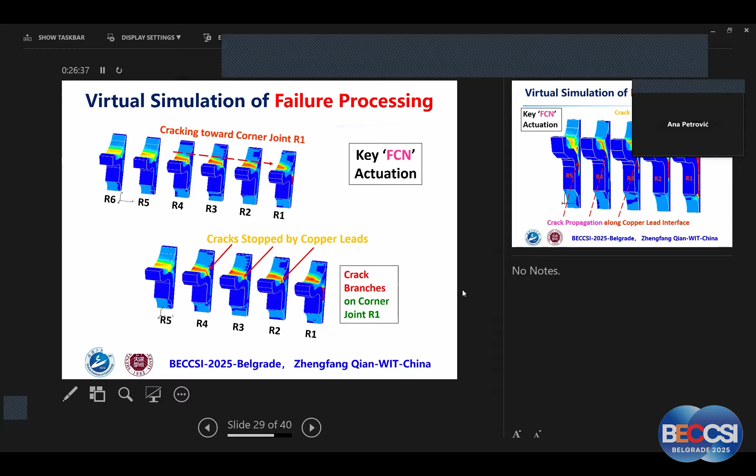This is the crack starting. This is two branches starting now. The third one, you will see they're connected together. This is the crack, comes to a stop, and started here, then they connect together. So finally...

This is the simulation, these are SEM pictures. I didn't do anything, I didn't cheat, okay? This shows exactly how they failed.

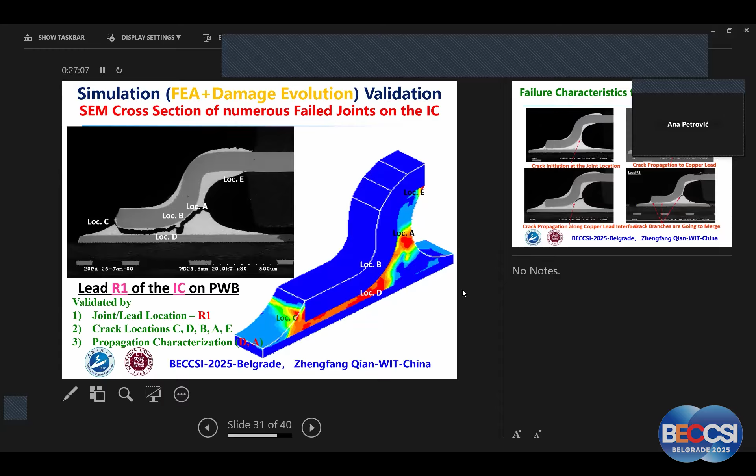Then like this, we predict all those processes that could start it, that could stop it, that could be connected. And for this one, just for my pleasure, okay - how to verify constitutive models. Like I said, if you only do one dimensional, that's not sufficient. At least you have to do two dimensional.

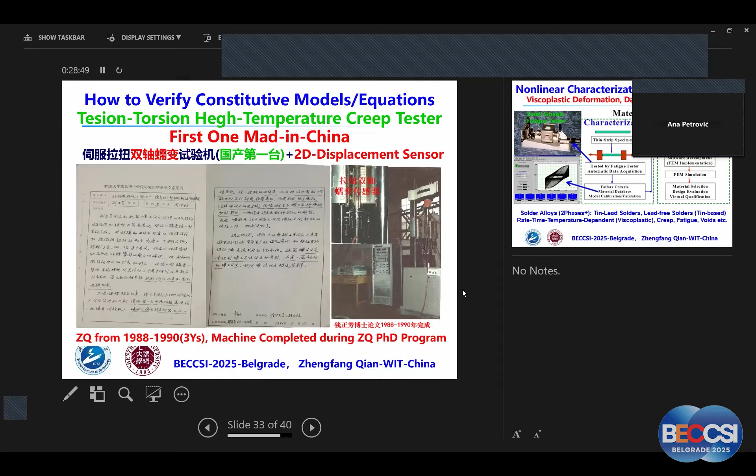It's not me. The second one I will show you is this sensor - I did it, designed it, built it, calculated it. At that time I didn't know we should do a patent, so we didn't patent it. I think it's intelligent work because you need to extend the deformation outside the furnace, and separate the rotation from tension, then measure them separately and control them. That's what I did.

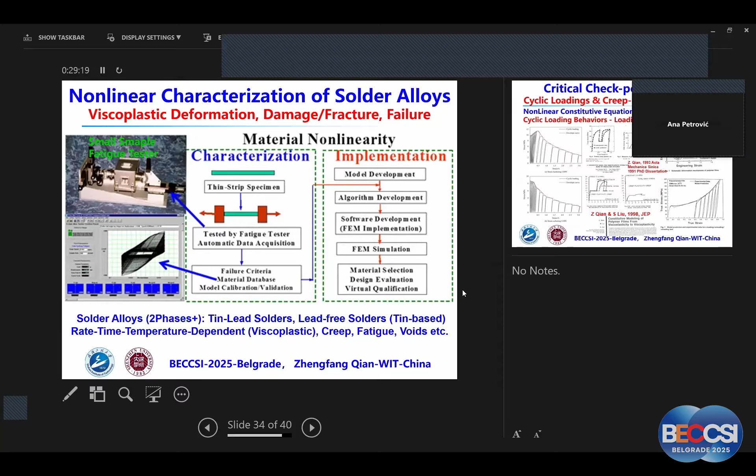Then I came to one university - you see the small sample fatigue test. We built this one especially for IC chips. There is silicon, polymer, compound, you name it - most of the materials we have inside for all those. So it's very complicated, but that means you have to build powerful equations for them.

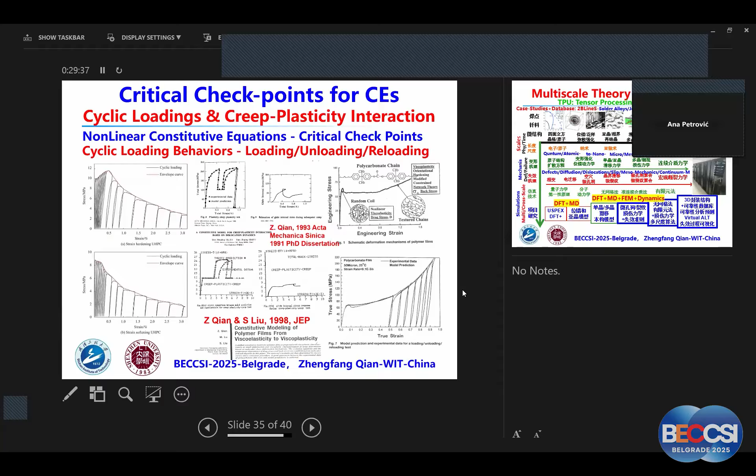I just said okay, then back to this. Finally I built the equation that could predict this correctly. And I even found out why other models couldn't do it and what's the reason.

Let me go a little bit now into how we do multiple scale simulation. Time is physical, but physical except time put together, you have a scale. This one was 10 years ago, I wrote to the NSF, they didn't fund me. Anyway, from quantum atomic to nano, micro, meso, macro - this is the one. Here, from deformation, failure, simulation - my team right now, we already combined DFT with MD. Ideally you put DFT, MD, molecular dynamics, FEM dynamics, even failure, all together. That will be very powerful and close the scale.

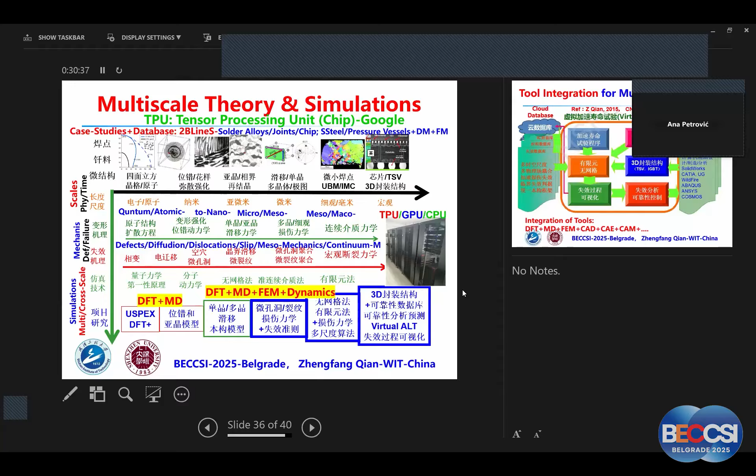And this is another suggestion of mine. In 2015, ten years ago, I read this proposal when I came back to China first. I think they were totally blind in the review. I do the tool integration for the multiple scale simulation - all those tools are out there. How do you integrate and make that work for you?

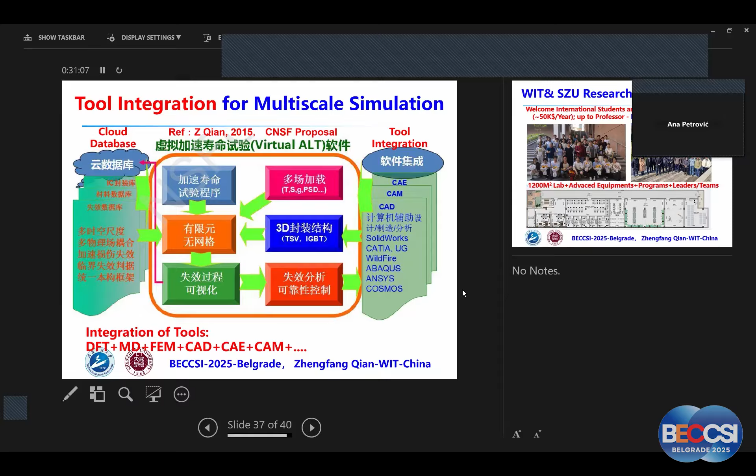That's the important part. Did I get more time? Sorry, I passed too much time. Okay, this is the last one now.

You see the big boss is here, Professor Tu. He invited me to this university now. That's my team. We have 1,200 square meters, building a new powerful lab. And welcome you if you can follow us - join us, talk to Professor Tu or me.

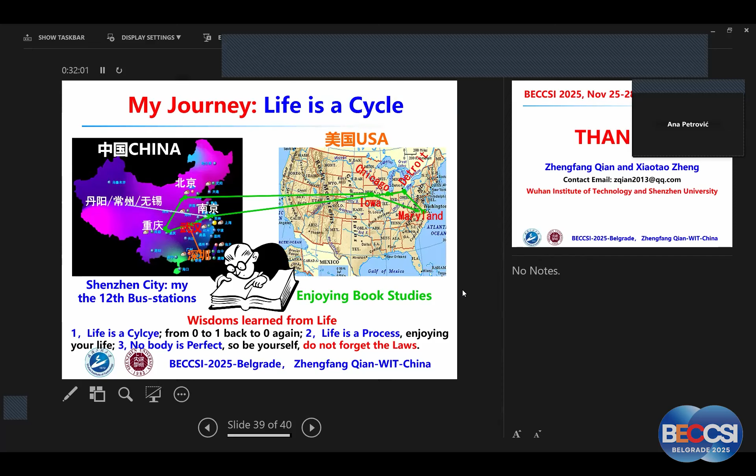This is my journey, I just want to show you. I've spent time in 12 cities, I enjoy book reading. And I believe life is a cycle - what's important is the process, it doesn't matter - from zero and back to zero. So don't worry about that too much. Okay, thanks.

Thank you very much, it was very, very interesting and impressive. Okay, we'll handle that, don't worry.